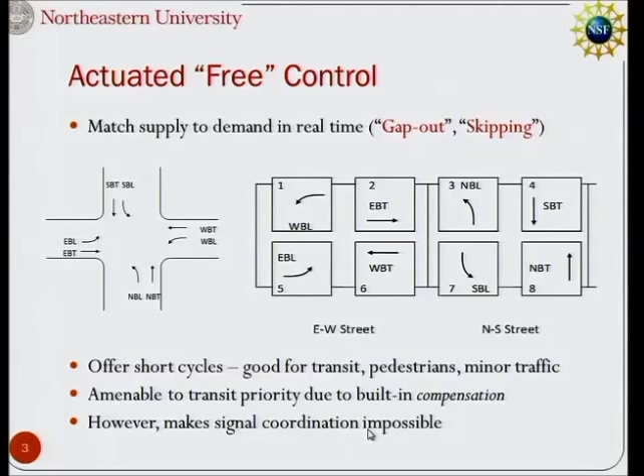So let's say I've got 3 intersections in a row, and one wants to cycle every 70 seconds. The next one, well, I need 90 seconds to cycle, I'm kind of slower. And the next one, well, I can cycle every 55. You can see that if you're driving along that street, you're just not going to get 3 green lights in a row. They're all doing different things. You lose that coordination, and that makes it frustrating if you're going through lots of traffic lights.

So our standard way of dealing with that is to do coordination with a fixed cycle length. Instead of letting each signal cycle as fast as it wants, they're all required to cycle the same length. And if this guy likes 70, this guy likes 90, and this guy likes 55, well, we usually have to take the largest amount because they need 90. So we force all the signals to now cycle at 90 seconds.

Now I get a green. Oops, I got a red light. Now, oops, I got a red. Oh, now a couple get through, but most of them, you know. This is an example where northbound got really good service and southbound got really crappy service.

And you might ask, well, isn't it possible to have green waves in both directions? And the answer to that, if you take a traffic engineering class, you'll learn, is yes, if the spacing is ideal.

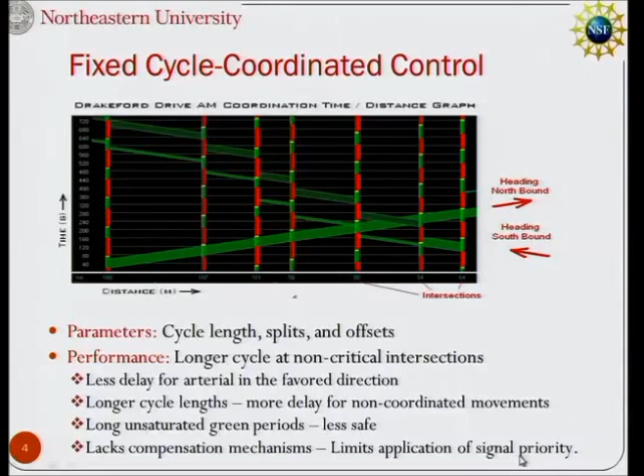Actuated signals have very little unsaturated green, because the way their logic is set up, you discharge your queue, that's the end of your green, next phase is turn. But the way coordinated signals are set up is: wait, there's a certain green band that we have to provide for two-way coordination. So maybe you're only expected to have a bunch of cars coming through during a 10 or 15 second period, but the light's going to stay green for another 35 seconds. So they're less safe, and they lack compensation mechanisms that greatly limits the application of signal priority. I'll explain that more as we go along.

Besides fixed time control and actuated control, there's a third type of control, adaptive control. I understand Portland now has some adaptive control on Powell Boulevard. Most adaptive control methods have detectors out there so they can adjust according to whether the traffic is heavy or not.

But they still use standard fixed cycle logic. They're using data to decide, should I change the cycle length? It might have been 90 seconds 5 minutes ago, and now they've decided to change it to 86 seconds, and 5 minutes later they might change it to 82. That's nice, but still they change the whole street to that same cycle length. They run standard offsets. It's still all the disbenefits of fixed cycle coordination are there.

The benefit that they add is at least the fixed cycle length that they're using is well adapted to the traffic demand.

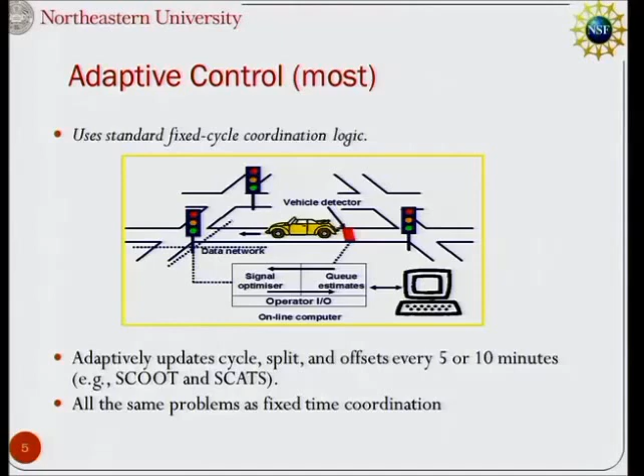There's a fourth kind of control that has been studied, but it's just not used in practice, where they're actually doing optimizing, where they know about traffic that's coming from everywhere, and everything is free. Should I change the cycle? Should I change the light now, 2 seconds from now, 4 seconds from now, 8 seconds from now?

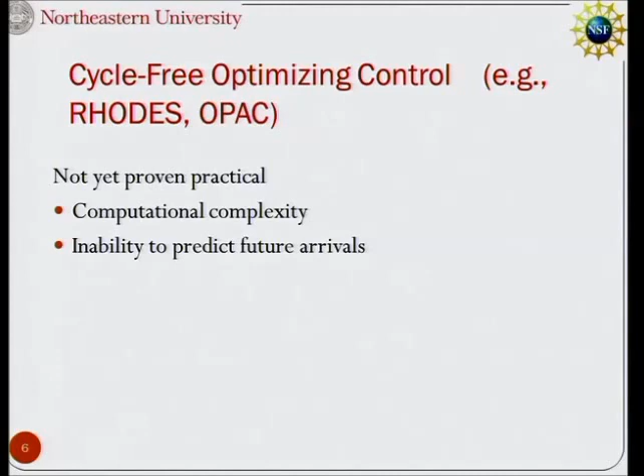These things have been studied in the literature, they've been tested, but the computational burden is really high. Even if we could get over that, because our computer power is getting better, they have an inherent problem, which is you can't predict the traffic 30 seconds out. And that's what you need, 30 to 60 seconds out, because the traffic you're going to get is coming from other signals, and they're going to be deciding what to do.

So instead, the direction of improvement that my research is taking is saying, let's start with basic actuated control. It's really nice, it has so many nice features. It just has this one weakness: it doesn't provide coordination. So let's see if we can add some coordination mechanisms so that without imposing coordination, things will coordinate and I'll get better service on the arterial.

Let me illustrate. Let's say here's intersection 1 that wants to cycle at 90 seconds, that's just what it likes to do. And here's intersection 2 that likes to cycle at 75 seconds, maybe they don't have some left turn phases, so it goes around faster. Now let's say at a certain point in time, the two are just in sync, so cars released from intersection 1, when they arrive at intersection 2, the light turns green just before they arrive, and they sail right through, and it's great.

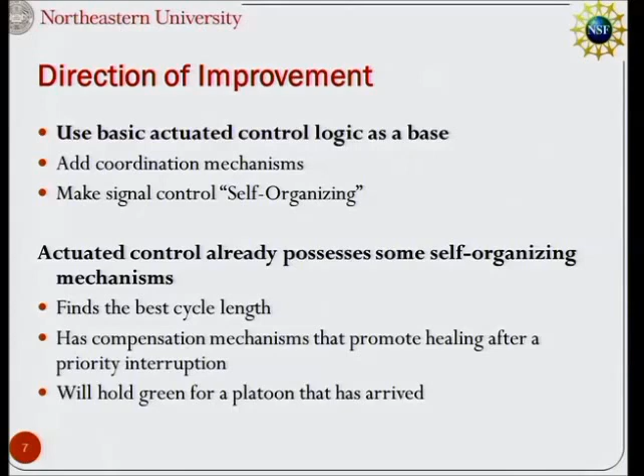What my research has done is propose one main mechanism for intersections that aren't really closely spaced, and then a bunch of other things when they are closely spaced.

I'm going to skip over this part and go right to the main coordination mechanism, and that is something I call a secondary extension.

So the question is this. Here we are, the light for the traffic heading eastbound is green, and here are the last two cars that went through, and now there's a gap, a big gap. So I'm ready to gap out.

Gap out means, because I detected a gap, I'm ending the green. But at that moment, I look upstream and ask, is there a platoon coming? If there is, maybe I will hold the light green. That's the secondary extension. Should I?

I think everybody would agree the conditions for whether to hold should be based on, number one, is there excess capacity at this intersection? Because while I'm holding that green, I am wasting green time. The light is being held green and nobody's using it.

Can we afford to waste green time? The answer is most of the time, yes. We have excess capacity at most of our signals most of the time. But sometimes not. So if I'm oversaturated or on the verge of it, I will not spend my capacity in order to get coordination. Capacity is more important, because if I go over capacity, now people are waiting 2 cycles, 3 cycles, queues start getting long, it all falls apart.

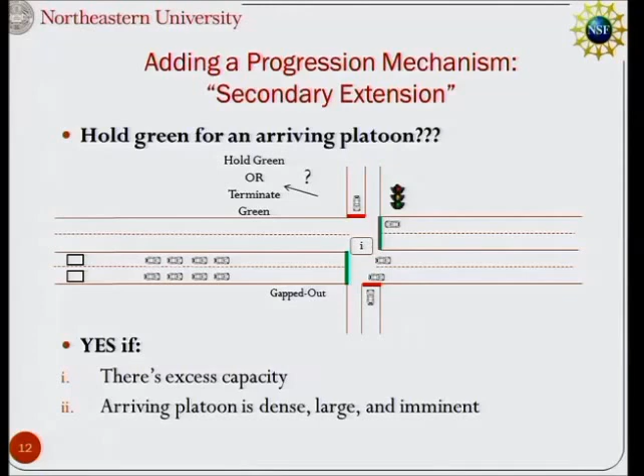So operationalizing that as a measure of how qualified a platoon is for a green extension: how much lost time will there be per vehicle in the coming platoon. The lost time is the difference between how much time I'm going to hold the light green minus how much time I'm going to use.

Used time: you have to understand that when traffic is passing through a stop line, the closest, smallest average headway they can go through is called the saturation headway. It's about 2 seconds. So if I'm serving 10 cars, that's 20 seconds while I'm serving them, completely used, not wasted. I would have needed to spend 20 seconds to get them through any time.

So ask, how long am I going to be holding the green? Now subtract how much of that is going to be used. Let's say if I hold the light for 30 seconds, 10 cars can get through. Then 30 minus 10 times 2, so 10 seconds is wasted. Divide that by the number of cars: 10 seconds wasted for 10 cars, I'm wasting 1 second per car.

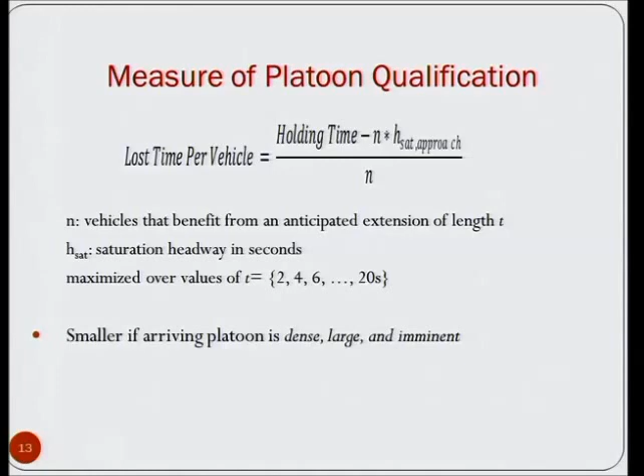So if a lot of intersections are operating around 0.7, that means if it's going to be 1 second lost time per vehicle, nope, you just don't quite qualify. But if you are down to 0.8 seconds per vehicle, then that's a platoon I'll wait for. Okay, so that's the idea.

If you ask, how do you know those are the right parameters? I did some back-of-the-envelope calculations to come up with what seemed reasonable, and then we did some sensitivity testing.

You know, what if we change the maximum? What if we change the cutoff point? What if we change the slope? And the results hardly made a difference. They got better in some cases, worse in other cases. So we were happy with this.

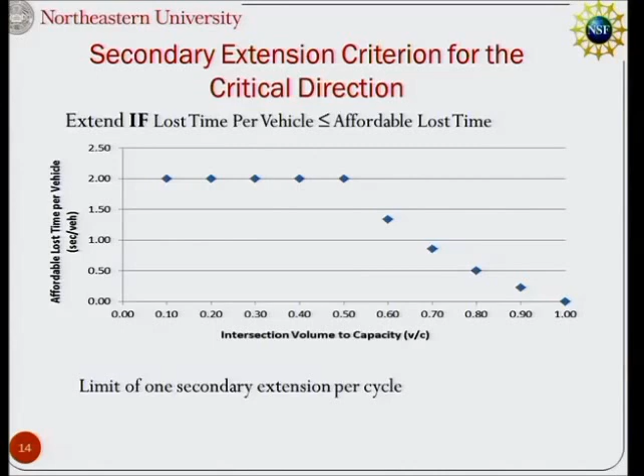And I also put in the rule, only 1 secondary extension per cycle. So remember, the secondary extension starts when there's a gap. You're ready to gap out. Shall I extend? Okay, let's extend. Now, once you've extended, when does the extension end? It ends when you gap out. You hold for your extension time, and then you can hold longer than that as long as there's cars coming through. But once you gap out, you don't ask, how about another secondary? No more secondary extensions. The other traffic needs a turn.

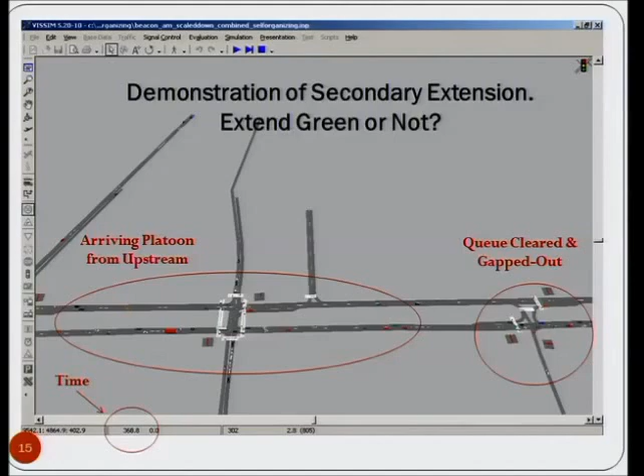So at that point, I now look upstream and I say, who's arriving? Is there a platoon that's arriving? I've got detectors up here to count cars. I've been counting how many people have been going across and when. And from those counts, I have a profile that I update every second of when, over the next 20-second horizon, I expect cars to be coming. So I've got a prediction. I've got a car coming 19 seconds from now. There's another one 14 seconds from now. There's another one 13. So from that profile, I make the calculation of that lost time per vehicle.

Oh, and I forgot to say, in that calculation, you say how much is the extension and so on. How do you know which extension to use? We say, what if there's a 2-second extension? 4 seconds, 6, 8, 10, 12, 14, 16, 18, 20. And of those values, one is better than any of the others, the one that's the best, and that's the one we'll use. So we'll find out which extension gives us the best measure. That's the extension we'll make. So we look over here, and we decide, and this platoon, even though it's spread out, if the cars are moving fast, it's the time between cars that matters, not the space. So at the speed they're going, this is a pretty dense platoon. So, yep, we are going to hold.

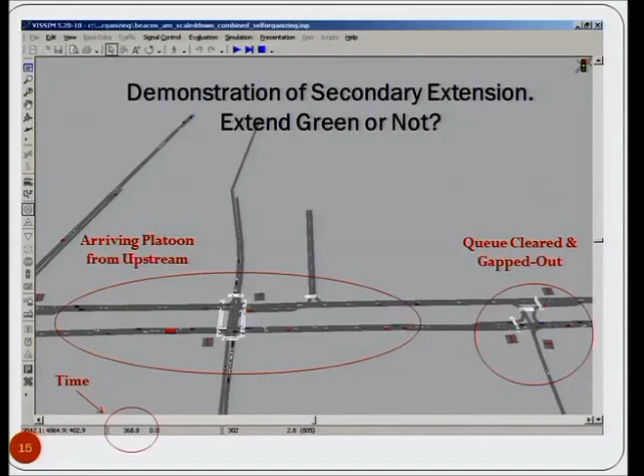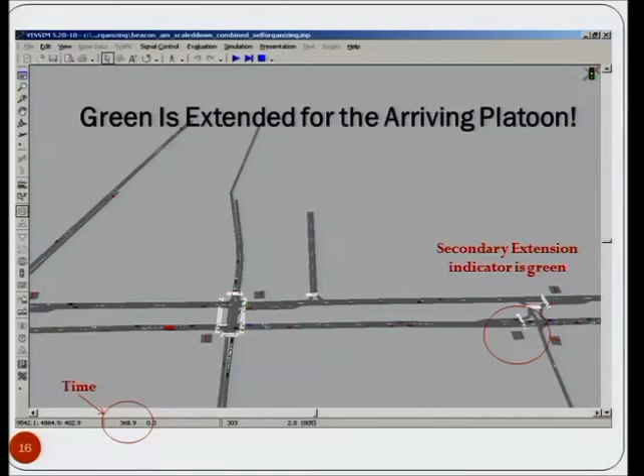So at time 369, now the secondary extension is on. And let's say the extension we decided to do is 18 seconds. Maybe it was 12 seconds. I don't know. I'm committed for that long. And after that point, I will continue to hold the green until we gap out. So it turns out that the secondary extension turns off, and it doesn't gap out until time 399. And you see all these cars, they got through. So that way, my platoon that got through one intersection can get through the next one, and I got nice coordination on the arterial.

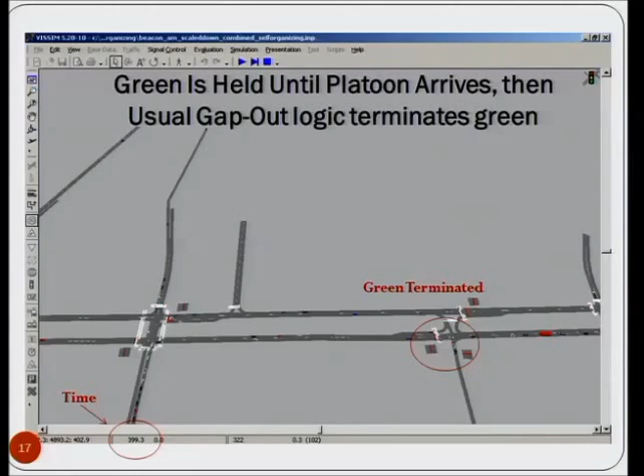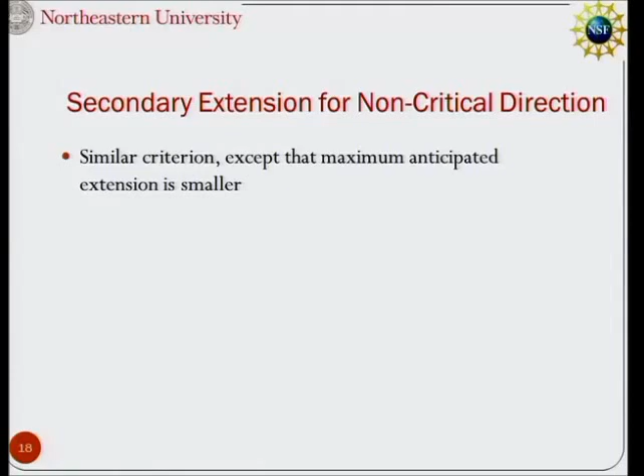We also do secondary extension in the non-critical direction, and usually on an arterial, one direction has more traffic than the other, but we won't allow as long. So then the next thing, so that was the first mechanism, secondary extension.

It seems like a pretty simple idea, but as far as I've seen, nobody has proposed that in the literature before.

Secondly, there's a set of rules for when intersections are closely spaced. When intersections are closely spaced, you get a problem with queuing — if the queue from one intersection can't fit because the block isn't long enough, it spills back to the next intersection. There they do need closer coordination. So we impose rules to force them to be coordinated, but not with a fixed cycle length.

The basic logic is this: in any group of closely spaced intersections — we keep our groups small, maybe 3 intersections — one of them is critical relative to the other two. One needs a longer cycle length. So the rule is: everybody follows the critical guy. If the critical one says this cycle needs 90 seconds, we all go 90 seconds. Next cycle it needs 70 seconds, we all go 70 seconds. That's the basic logic we're trying to follow.

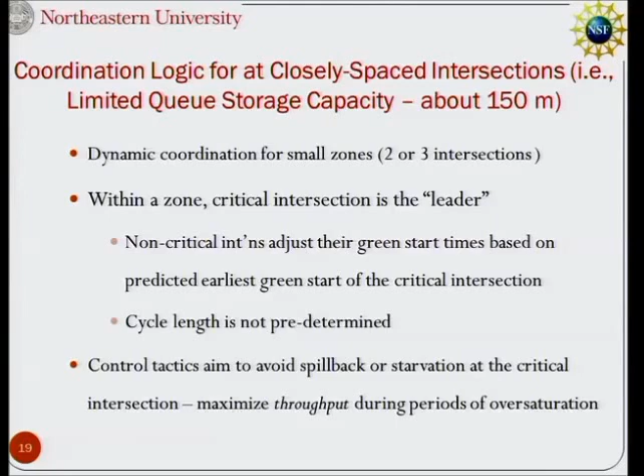We call this dynamic coordination. This is a term Zurich was using for their traffic control, and they were using logic like this — that's where I got the idea. Within a zone, the critical intersection is the leader, but the cycle length is not predetermined. The control tactics care about protecting the critical intersection from starvation and spillback, since those waste capacity and green time. But at the non-critical intersections, they can afford a little bit of starvation and spillback.

Here's an example of dynamic coordination. These examples are from Beacon Street in Brookline, Mass, where there's a light rail running down the middle, and my home was only two blocks away. I always tell my students: in your projects, make the traffic work better for your professor — you'll get a good grade.

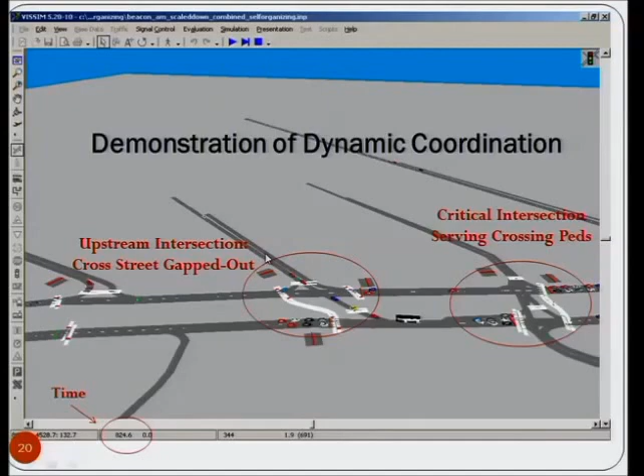Here we have a situation where this is the critical intersection, and this one is coupled with it — they're in the same zone. The critical one isn't ready to turn green yet because pedestrians are still crossing north-south, and due to the countdown we know it won't be ready for maybe 10 seconds. We're ready to turn this one green, but what's the use? The cars would just join the queue at the red light and not get anywhere. So instead, we tell the non-critical one to wait and keep the light green on the side street, since maybe another car will come along to enjoy it.

You see the dummy signal here — the side street is just getting an extended green. Maybe this car will make it through while we wait for our leader. Once the leader turns green, we calculate when our upstream intersection should turn green so it can match, and it works very well.

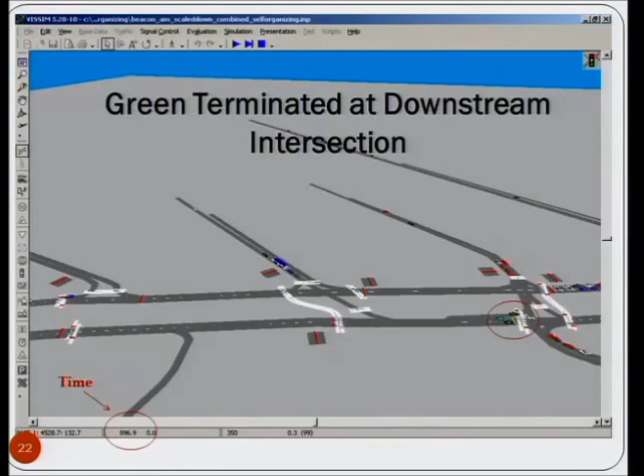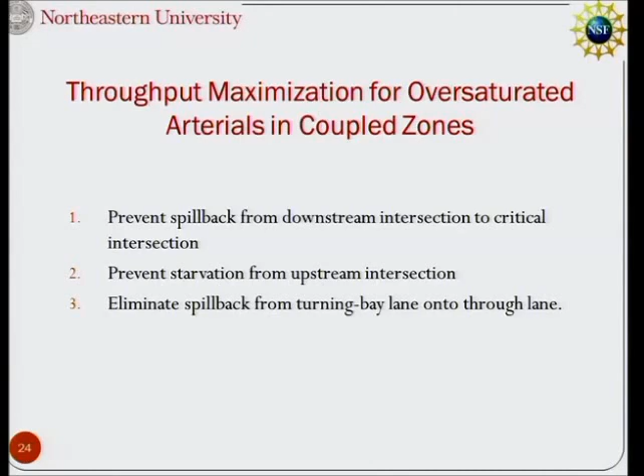I'll skip over that. When an intersection becomes oversaturated or close to it, capacity becomes more important than coordination — throughput is the most important thing. Once you're over capacity, coordination is meaningless. If you're waiting two or three cycles, who cares about getting a green wave to the next one if you still wait two or three times? So we have some rules for that.

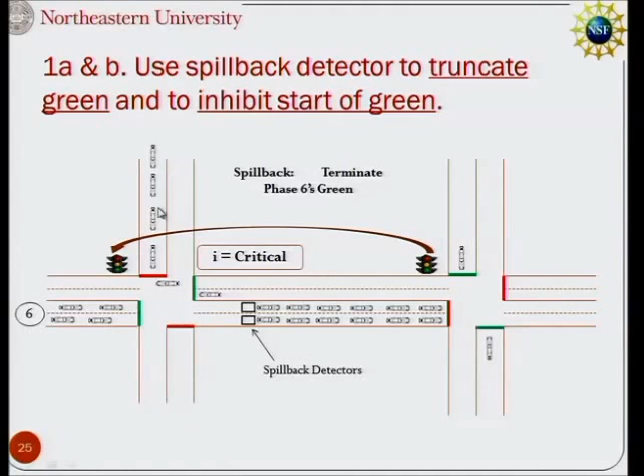One rule is we use a spillback detector — pretty common in arterial control today. If the queue is building up and cars are sitting on these spillback detectors, that tells us to turn the light red, because we don't want things to spill back and we don't want to waste green time when nobody can move. Instead, switch to serve the cross street and get some cars out of the way. I can also use that to inhibit the start of green — if I'm ready to start green but the spillback detector is occupied, I won't start the green. I'll let the cross street have more green time and hope to serve some cars that way.

If I want to protect the critical intersection, I'll allow a little bit of starvation and spillback at the non-critical one. For example, after these 6 cars go through this green light, there's going to be starvation, because the critical intersection's light is red. I would not let that happen at the critical intersection, but I will let it happen at a non-critical one, since it has excess capacity. I'll tell this guy to just keep holding the light green and wait for the critical intersection so that traffic can go through.

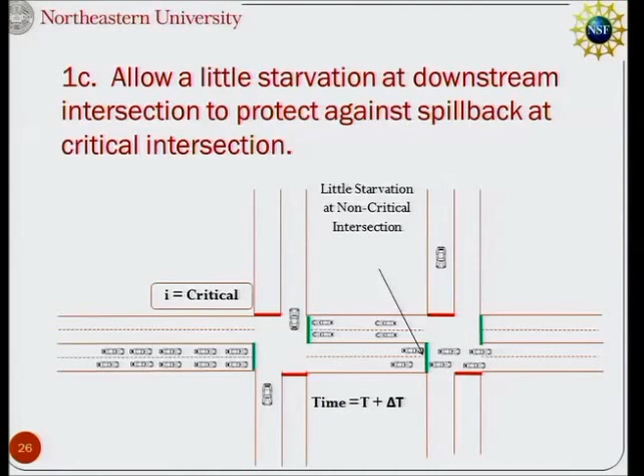All right, enough on that.

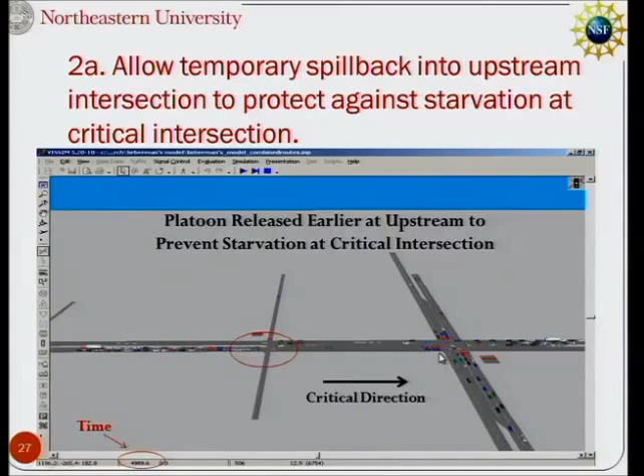Then this one will turn green, and the whole platoon will clear out. The platoon has arrived, and they're spilling back a little bit in here, but it's okay - now it's become one solid platoon that will just move right through.

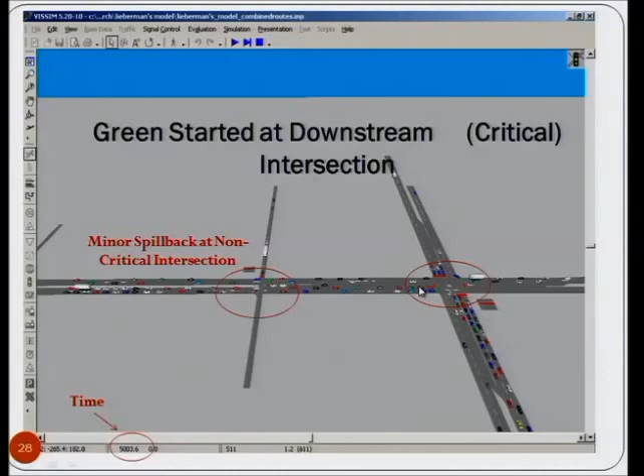Okay, there's another tactic here, and I'll skip that due to shortage of time. So now let me tell you about some tests that we did.

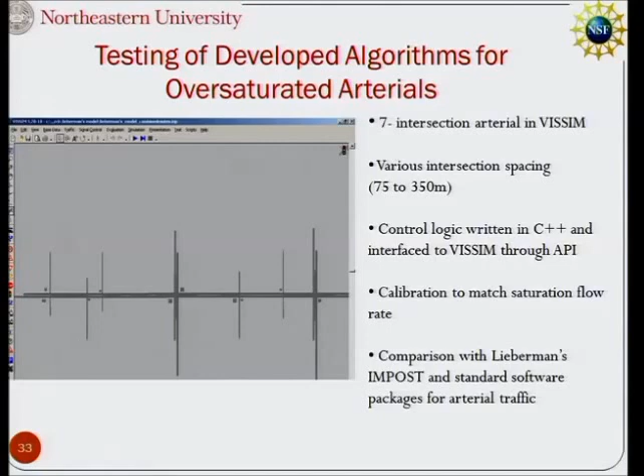One was a test looking at an oversaturated situation. This was a test that had been done by a researcher named Lieberman. He developed a really complicated method with all kinds of optimization that he called IMPOST, specifically designed to make traffic work better in oversaturated situations. What he reported in his paper was enough that we could replicate that situation and test our method in exactly the same environment.

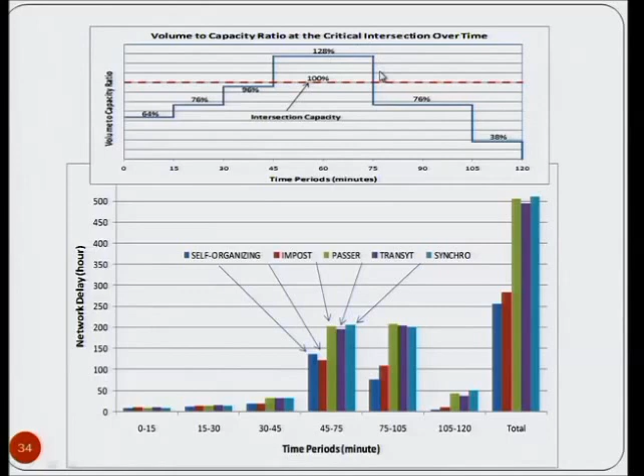In the test, there's a 30-minute period where the volume capacity ratio is at 128% - way over capacity. Leading up to it, traffic gradually increases, and afterwards, traffic goes down.

When we look at the 5 methods - here's our new self-organizing method, this was Lieberman's IMPOST method, and then PASSER, TRANSYT, and Synchro, 3 softwares often used to get signal timing settings for coordination - during low traffic periods they're all good. During the overcapacity period, our method and IMPOST are way better than the others.

Afterwards, our method is much, much better, because it focused on throughput. You can't avoid residual queues when there's overcapacity, but we got them through. We wasted the least amount of green time, so we got them through, and now we're down to very low delay, and in the next period, very low delay too - so when you average out, our method and IMPOST are much better than the standard methods that don't account for that, and ours was still a little bit better.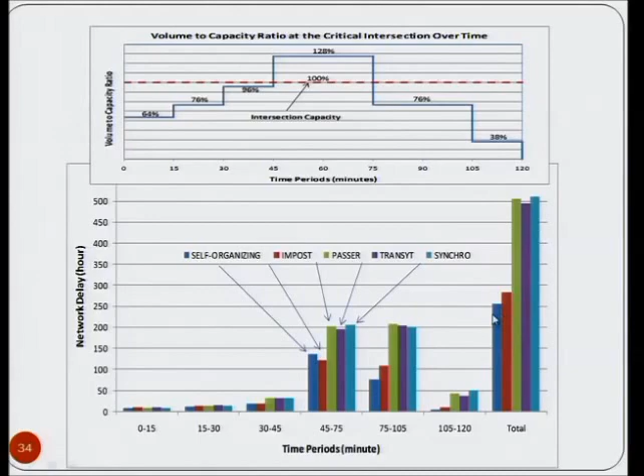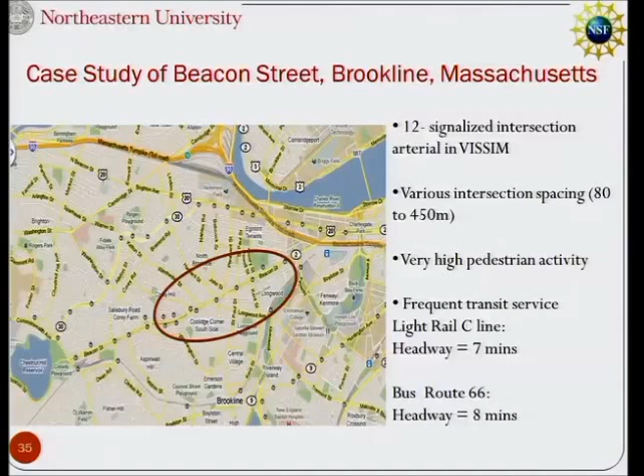We did a simulation on a section of Beacon Street with 12 signals with highly variable spacing and lots of pedestrian activity. Don't trust anybody who does a traffic simulation of signal priority that leaves out pedestrians - if there's no pedestrians, there's probably no transit, and there's no point giving transit priority where there's no pedestrians. Pedestrians really constrain traffic signals, so you need to account for them.

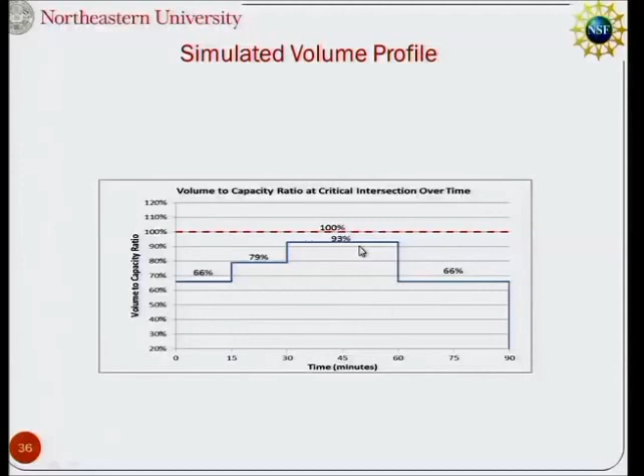So this is the volume profile that we used. It rises to near capacity, but not quite, because that's the real situation. Transit's running every 7 minutes.

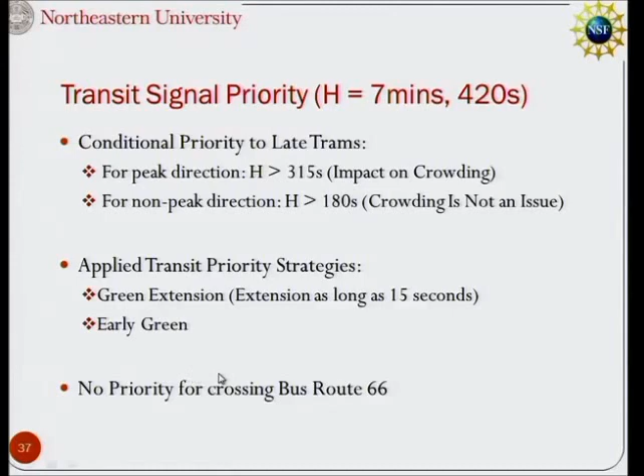When we applied conditional priority, we gave priority if the headway was greater than 315 seconds. If the headway is less than 315 seconds, that means you're too close to your leader, so I don't want to give you priority - I want you pushed back to keep the spacing closer to 420 seconds. And we used green extension and early green.

The main difference is that with actuated coordinated, it's a fixed cycle, everything cycling at 80 seconds. With self-organizing, every signal can do whatever it wants, and on average they were cycling at 69 seconds. So that means lower pedestrian delay, better safety.

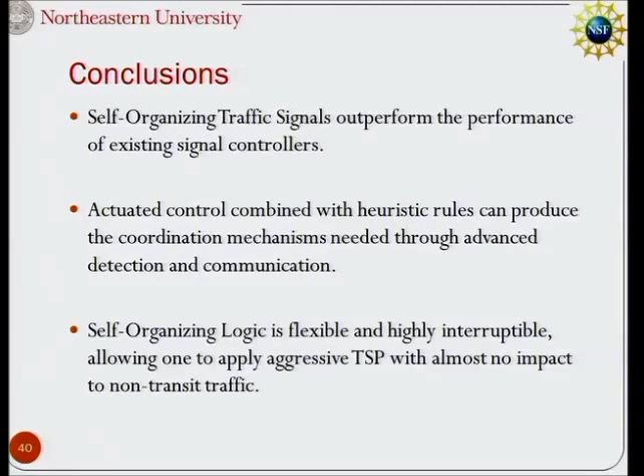And it's probably better for bikes, too, but I haven't studied that. So I think it's a good way to go. So now I'm glad to take any questions that you have.

Does the delay used to calculate the secondary extension take into account the number of pedestrians waiting? Is it just vehicle delay, or can you count pedestrians, saying this pedestrian is going to have to wait an extra 20 seconds?

Let me clarify. I'm not calculating what delay is going to be imposed on others, not at all. What I'm calculating is how much green time am I going to waste. Now, in general, if you waste green time, you're hurting somebody, but I'm not counting how many somebodies are hurt, whether it's people in cars or pedestrians waiting. The general idea is that I like short cycles. I want things to move around fast, because then all the people waiting, pedestrians and in cars, will get served sooner. So I'm not going to make anybody wait unless a lot of people are going to benefit from it. That's the calculation.

My question was, you said it's safer to have less unsaturated green time. Right. But when you have a secondary extension, doesn't that make the unsaturated green longer? So when there's a secondary extension, there is a period of unsaturated green while I'm waiting for that platoon to arrive. Once the platoon gets there, now it's saturated again.